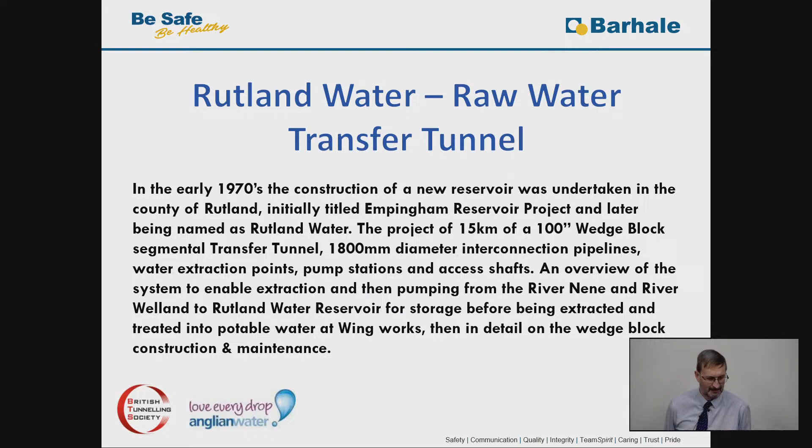The tunnels are constructed using wedge block tunnels, and when I was a site engineer in the late 80s, we were constructing the same thing for Lee Valley in North London. Since then I've also been involved in relining tunnels in London where the wedge block system has actually failed. That's why I'm so involved and enjoy understanding what's come out of Rutland - it's only about 10 miles from home as well.

So we're going to cover the development to the approval process, a bit about the design and ground investigation. There's two lots of shafts and tunnels - those connected to the back of the actual dam area, and the main tunnels that take water from the two downstream rivers up to the reservoir. Good bit about the segments because they're slightly unusual, and something about the shafts and tunnels.

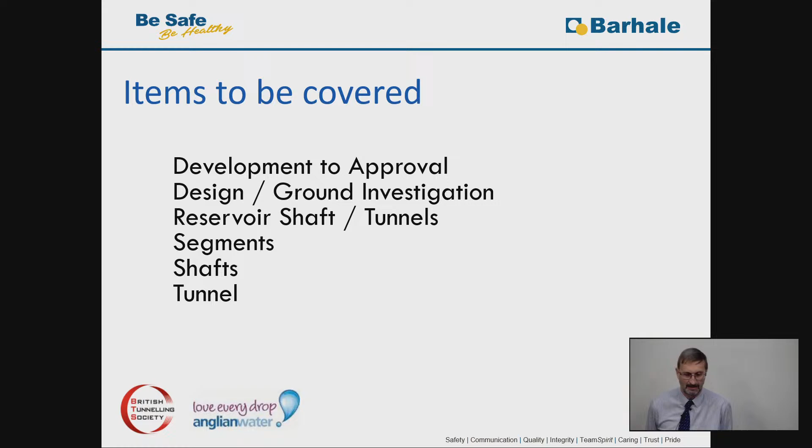The process all started after the reservoir at Pitsford was completed in 1956. The two engineers at the time, who worked for Mid-Northamptonshire Water Board and Thomas Hawksley's consultant civil engineers, moved over from that project and started looking at the location for the next reservoir. The reason was that they expected big expansion plans for several local towns in the 1960s and onwards, and there wasn't the water capacity in the area.

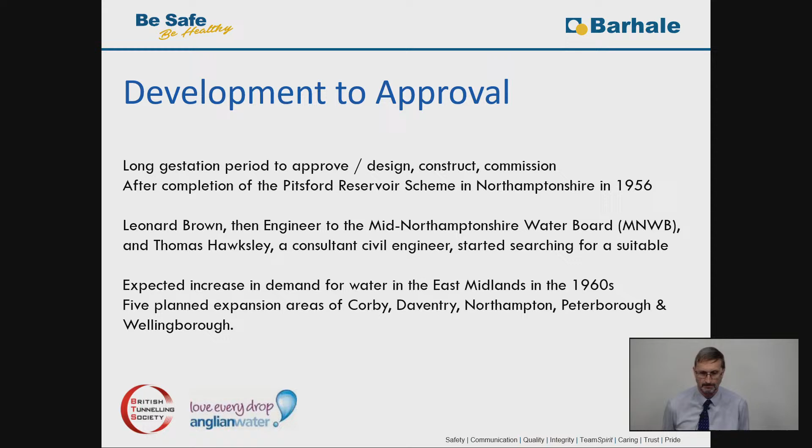Initially this was promoted by the Welland and Nene River Authority and the Mid-Northampton Water Board. They were looking at where to locate the new reservoir with a set criteria: they needed a valley with a suitable shape, the formation must be strong enough to withstand the dam construction, the geology must be right so you're not losing water through the base, and ideally you'd have local material for the dam, local rivers with large capacity to feed the reservoir, and local population needing the water without huge transportation and pumping costs.

Out of their investigations, they came up with two locations: the Gwash Valley upstream of Empingham, and the Chater Valley to the south-west of Manton. These were the two sites being looked at the time. At the moment, there's another long way since that - Anglian Water is now looking at their next two reservoirs and getting everything ready for what's called a DCO, a development consent order that has to be approved by the government. They're planning to be built in the next 10 to 15 years.

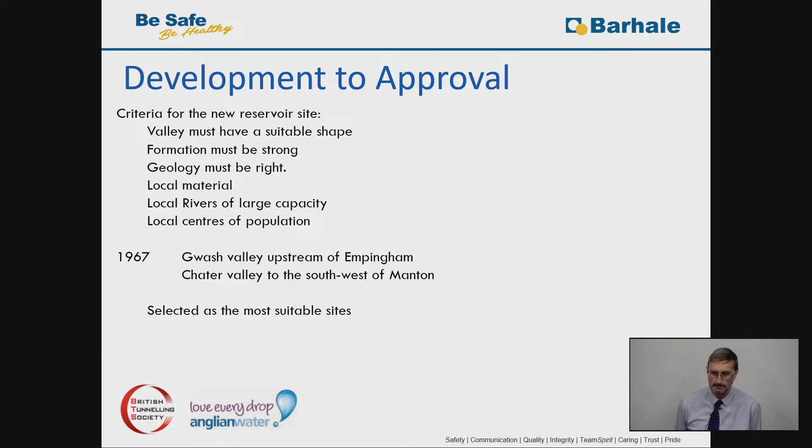So they did some primary geological investigation, and it was decided in 1968 to proceed with the promotion of these two reservoirs. Initially the idea was to promote both. After a while they decided just to promote Empingham Reservoir, and felt they could keep the Manton Reservoir option as an alternative for the future, whether that was in another 10, 20 or 30 years. But that has never materialised.

The two new locations are a long way away from that location. So the journey to constructing the reservoir started, and part way through this, the Mid-Northampton Water Board was replaced by Anglian Water Authority in 1973, and then later on in 1983 it was renamed and became Anglian Water.

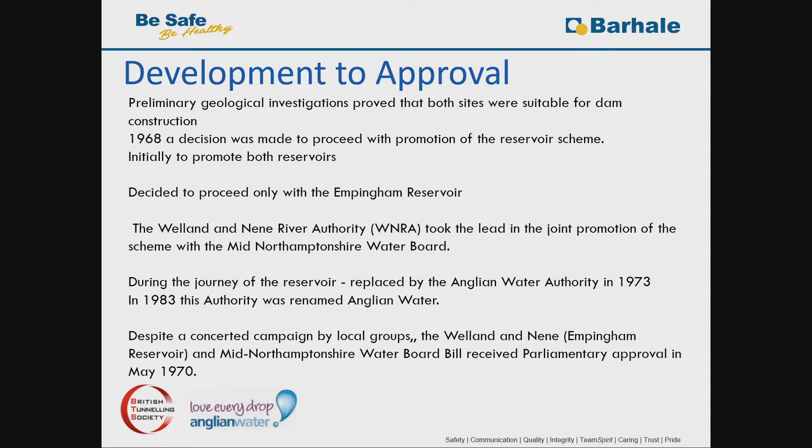The design was to flood around 6 or 7 square kilometres of the Gwash Valley, using the sides of the valley as well, not just the base, quite a way up the sides. Several villages had to be demolished to achieve this, and a lot of existing water wells had to be plugged as part of the ground preparation. The other great advantage was that there was a lot of clay in the area that could be used to build the dam.

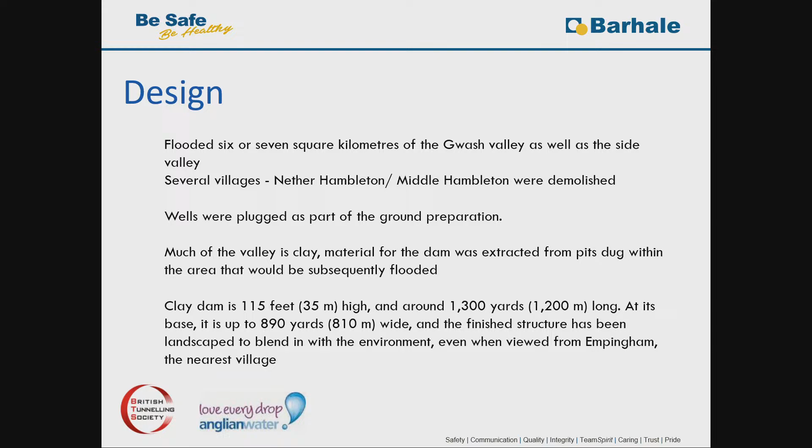The stats for the dam are there, and the finished structure - you can hardly see it if you go to Empingham and look up. It just looks like a big green embankment.

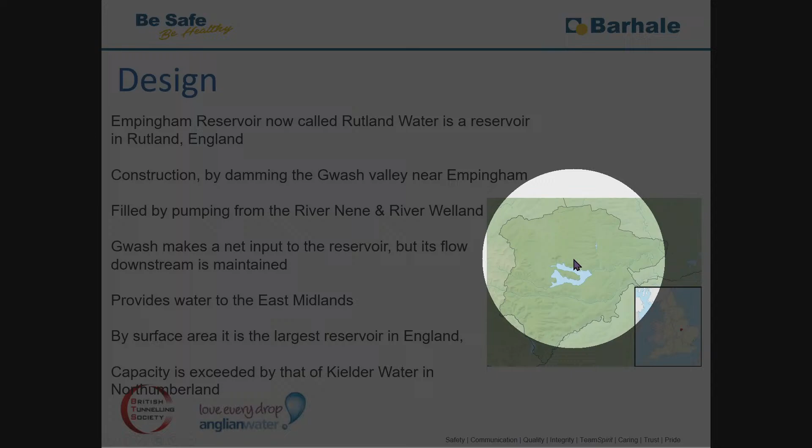To fill this reservoir, rather than using the River Gwash that comes down the valley - as you can see from the plan, it's got two arms, and the actual dam is right at the bottom here.

The Gwash River itself doesn't supply enough water to fill the reservoir. It does add some flow to the reservoir, but it is actually maintained downstream as well, so it still is an operational river as such.

The surface area of the reservoir is the largest in England, but its actual capacity is exceeded by Kielder Water in Northumberland.

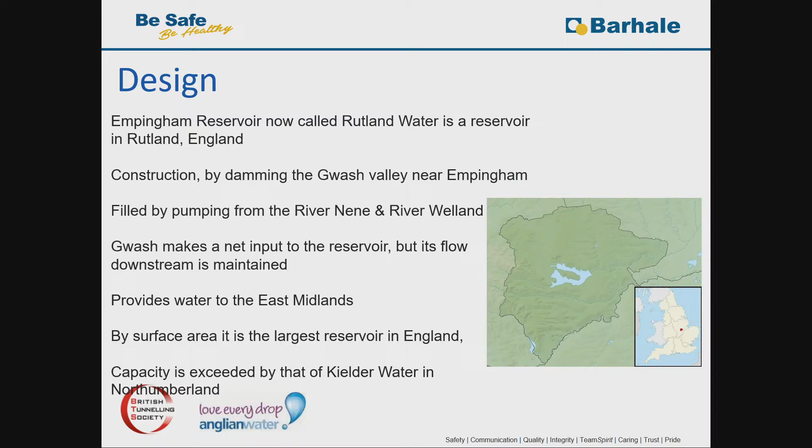The design and construction team: design responsibilities were spread across Welland and Nene River Authority, the main consulting engineers, and Mid-Northamptonshire Water Board. The main consulting engineers were involved in the diversion tunnels. The actual construction team were made up of Edmund Nuttall for the tunnels, and Gleeson Civil Engineering for the reservoir.

Something I'm not covering at all, but there was on some of the tunnel sections around the back of the reservoir, some tunnel relining, and there were some pipes installed.

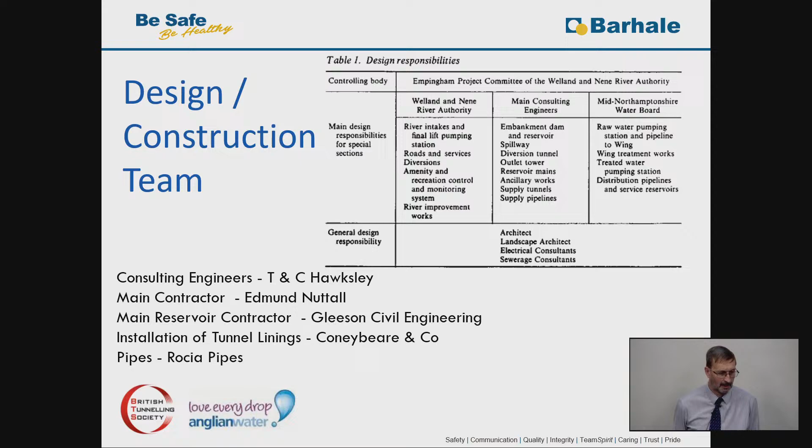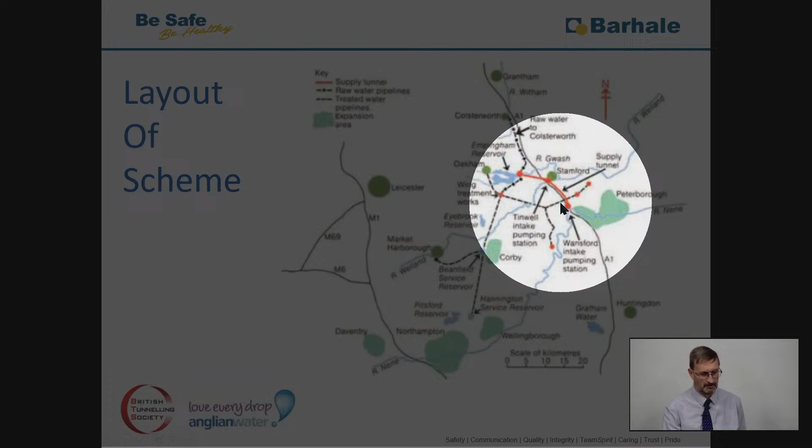So the actual reservoir in relation to where the water is coming from - you can see the reservoir here and the dam at the bottom eastern edge. But the flows are coming from the River Welland here and the River Nene here that goes into Peterborough. So to get the flows to fill the reservoir, they needed to pump all the way up to the reservoir.

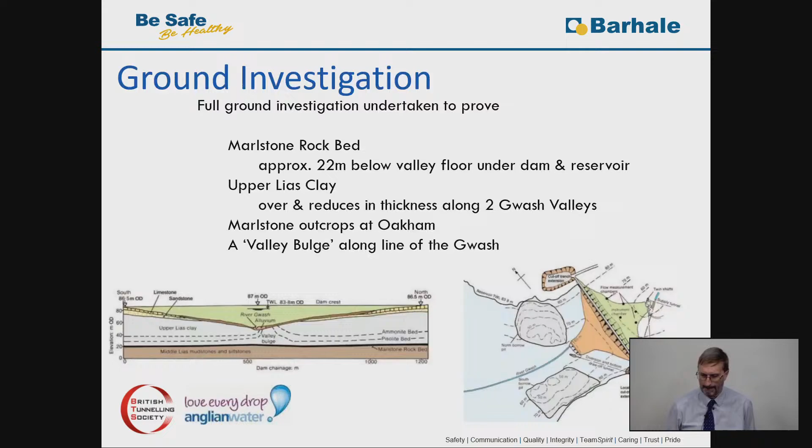A ground investigation was undertaken, and they knew that they'd got a Marlstone Rock Bed about 22 metres below the valley floor at the dam, overlaid by upper lias clay. But as that goes west up the two arms of what is now the actual reservoir, it became thinner and thinner, and eventually at the top end, which is where Oakham is located, a town in Rutland, the Marlstone actually outcrops.

Across the valley floor, that section also shows the green, which is basically the dam when it was completed. You can see a valley bulge that's occurred between the different stratas - it's heaved up, and that's a very interesting factor that comes into the shaft construction of shaft 6A and 6B a little bit later.

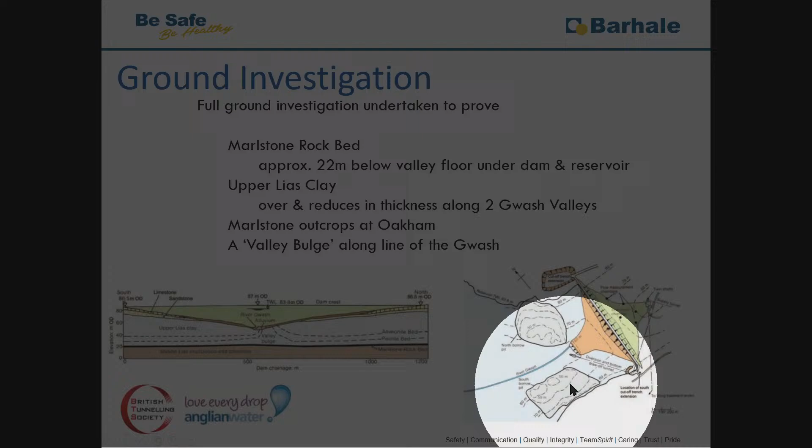Here you can see the proposal for the dam, but you can also see two grey areas, which is where the clay was removed to help construct the dam itself. So an absolute perfect location, a very narrow area to actually fill to produce the dam, but you'd also got the clay literally at the back of the dam itself.

The ground investigation did prove that there was a lot of disturbance, but it wasn't fully understood until the other shafts were put down, exactly where that disturbance was in relation to those shafts.

What it did give was, when they were actually constructing the supply aqueduct tunnel and everything, it made it very easy because it was very disturbed and easy to excavate.

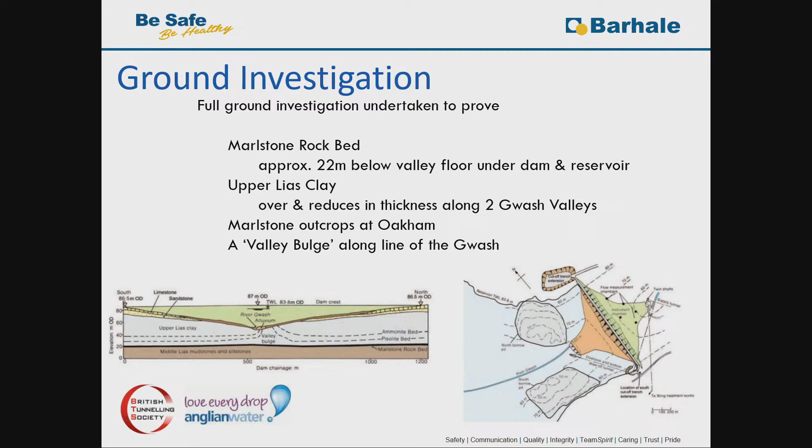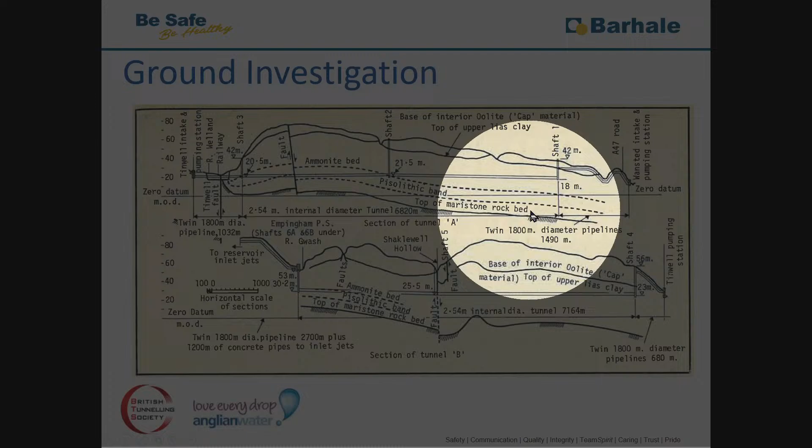The actual works around the reservoir - you've got your dam here, but there were also additional tunnels they were looking at. Normally you'd have an outlet tunnel coming through the middle of the dam underneath it. They decided instead to bring it out sideways and put an outlet shaft here, with a feed round the side of the dam to allow the flows to go back into the river if needed.

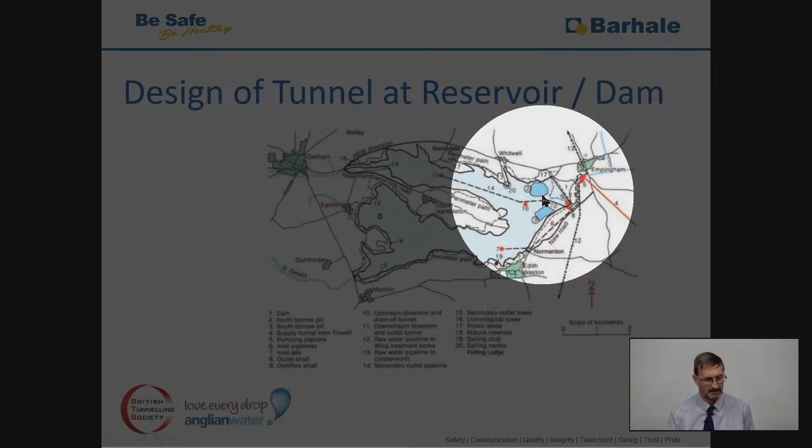This was very beneficial for the actual construction, because rather than having to put that through and delay the start of the dam construction, this could go on to one side while dam work initially started.

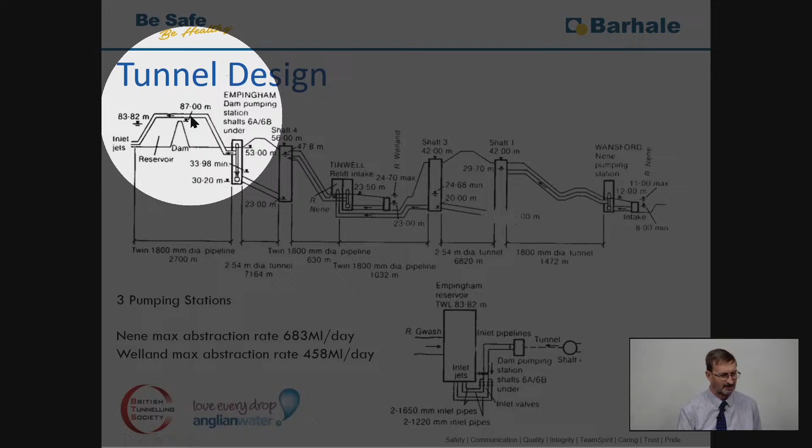A bit simpler version of what I've just explained: the water is extracted here, goes up the 1800s to here, drops down the shaft, along, then picked up at Tinwell, so it relifts up the hillside and on to Empingham, then up. It doesn't actually go over the top of the dam, but goes at that level around the side, then up the reservoir and through some inlet jets. You can see that described here.

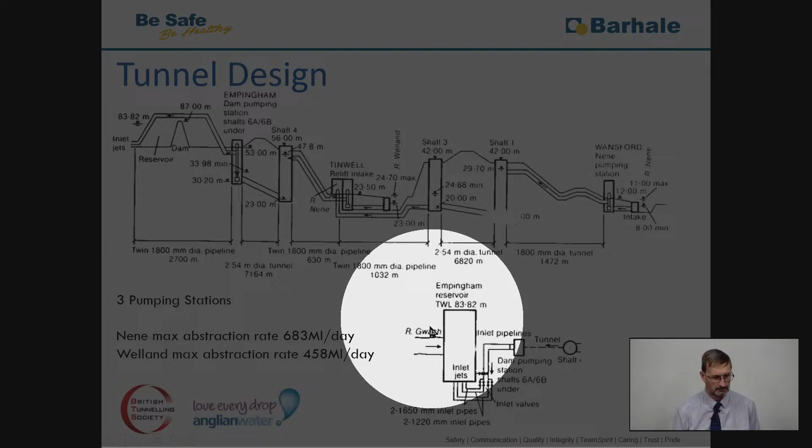You were talking about 7.9 cubics being extracted from the River Nene, and from the Tinwell about 5.3 cubics. Those figures have slightly altered over the years with different extraction licenses being applied for and EA requirements, but that's principally the sort of flows it was originally designed for.

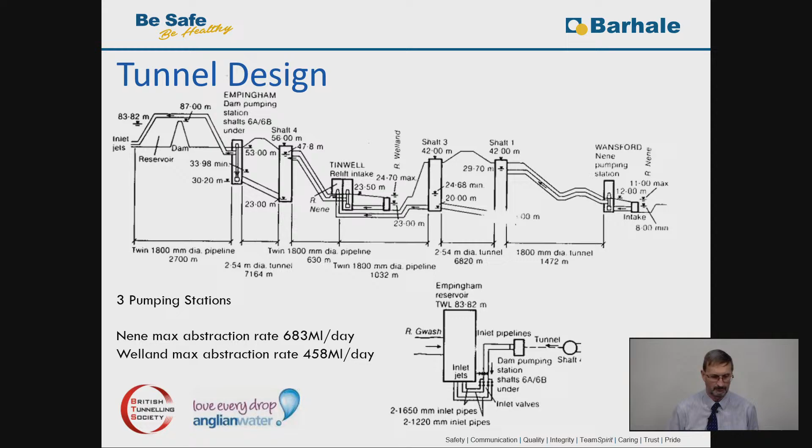So just covering the tunnels that were constructed at the back of the reservoir - you've got an outflow structure here, an outlet shaft here, a 3.66 tunnel this way, and a 4.42 tunnel going down this way.

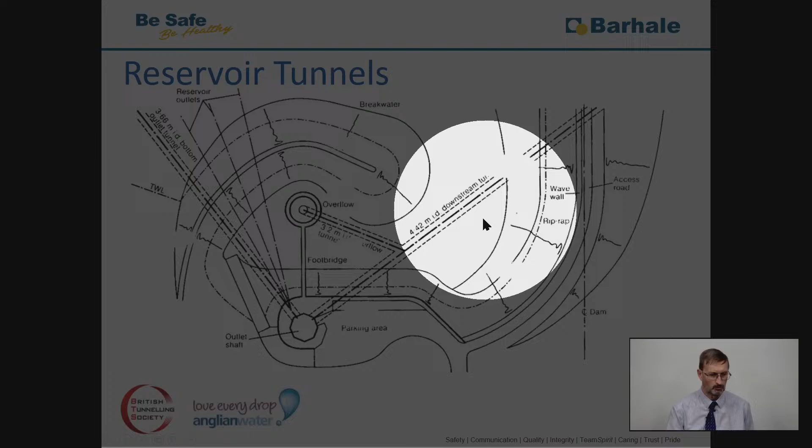These were all constructed while some initial work was going on with the reservoir dam itself. This also allowed for other things to occur because of expected settlement in the valley bottom - it was handy to have the tunnels and everything out of the way. They needed to put in a lot of deep sand drains that needed to be installed, and it kept the amount of tunnelling to a minimum by going round the side rather than down the centre of the reservoir itself.

And that's a photo of the outlet shaft going down. Back in these days, most shafts were constructed with concrete segments, classed as bolted segments, because they had pans in them and the bolts went through the webs. Today most shafts are constructed with either one-pass or smoothbore segments, but this was the way shafts were constructed in those days. The shaft segments were a lot cheaper to make this way.

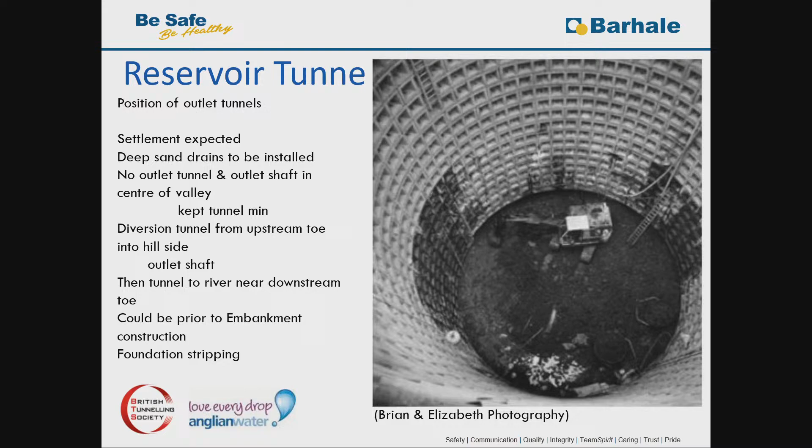The outlet shaft was 10.66 metres, 35 foot. The two tunnels were 3.6 and 4.42. They were both bolted tunnels as well, segments looking exactly like the ones for the shaft. But the upstream tunnel needed to be smooth.

So in those days you used to get a piece of concrete supplied by the supplier, called buckfill, because they were developed initially by a company called Buckham's that used to make the segments. You literally put this lump of concrete into each of the pockets with some mortar, filled it all in, and pointed it up, which made the tunnel smooth in the end. It looked like a normal one-pass tunnel that you see today.

The downstream tunnel was not done like that. They needed to put a landing in it to support one of the pipes, so they could have another pipe underneath it and various other utilities they wanted there. So when they put in the landing, the shutter also cast an in situ lining, so they didn't actually have to fill those segments with the buckfill.

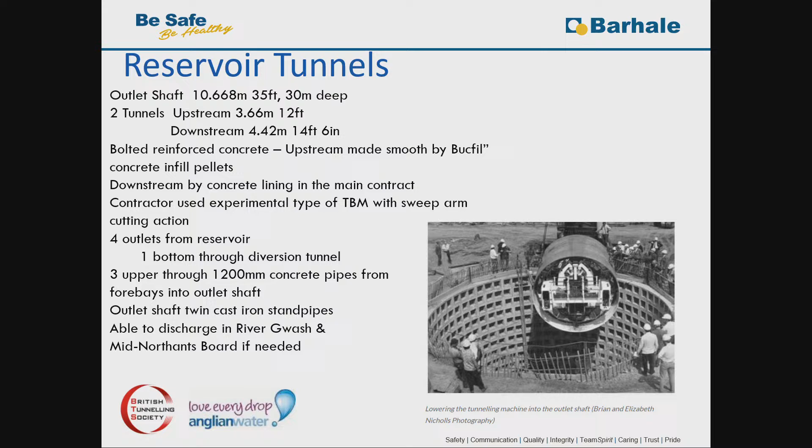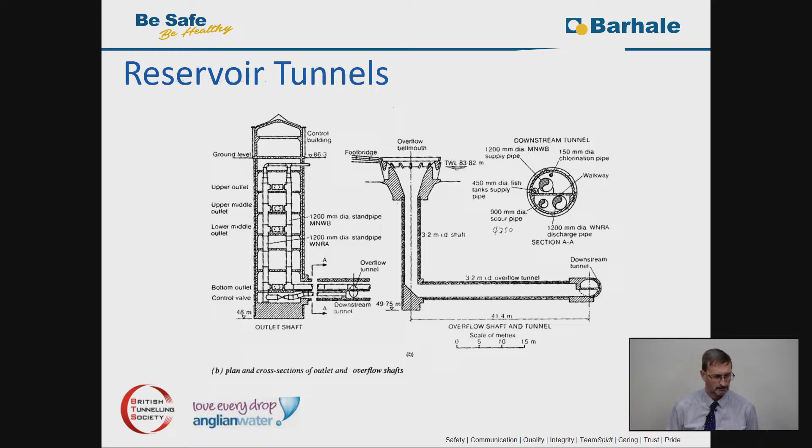So the 100-inch wedge block, it's slightly unusual. It was first patented in the 1940s. There's hundreds of kilometres of it installed around the country, the bulk of it in London, in stiff clay and chalk.

The segments form the ring with two wedge top segments. There's 9 segments plus the 2 top, and then you've got a key. You push the key in, it expands the rings apart against the surrounding clay or chalk.

This works in compression. There are no bolts holding these segments together, and they are either non-reinforced or very lightly reinforced. Sometimes they've got a bit of reinforcement in for handling and transport and that side of things.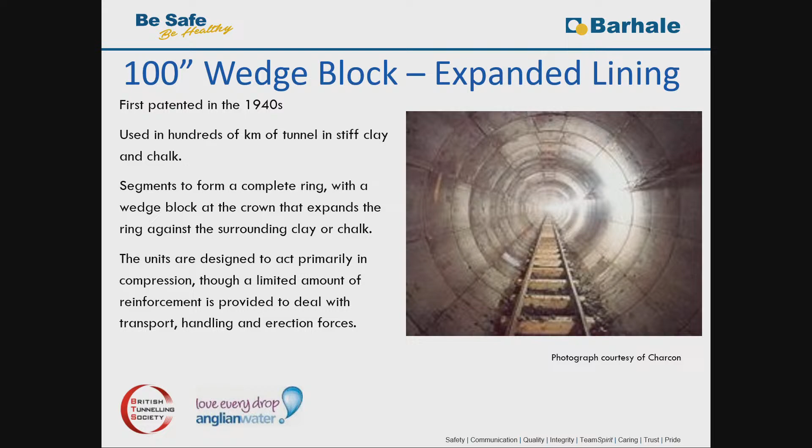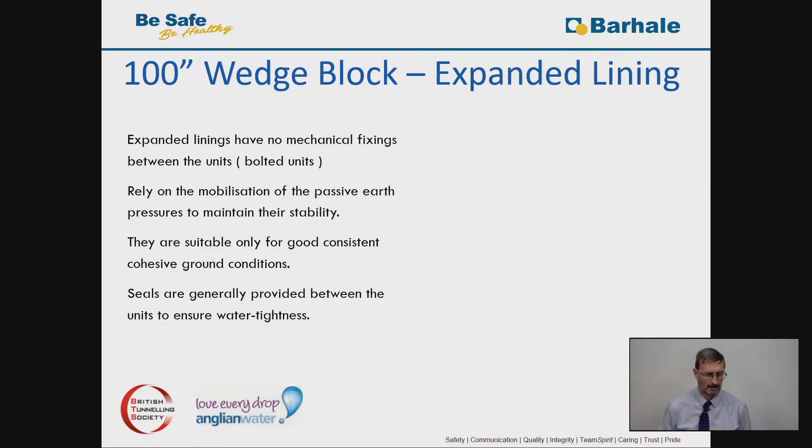So when you push in the top key or wedge, the top segments are tapered, and so is the key. You're trying to get it to push against the clay to a certain degree, or set. The tunnel machine is pushing that with a ram, pushing that key home, and it has a set, and that then gives you your required compression against the existing ground.

Depending on how the machine is cutting the clay or the chalk, if you're not quite obtaining the set you need when you push it home, the keys can come in different sizes. If you're struggling to push it home fully for any reason, you can go to what we used to call a -3 or a -6, slightly smaller. If you weren't getting the right compression and force on the set, you could go to a +3 or a +6. So you had that facility - literally a pile of them next to you in the tunnel machine, so that as things changed you could just change that key very slightly.

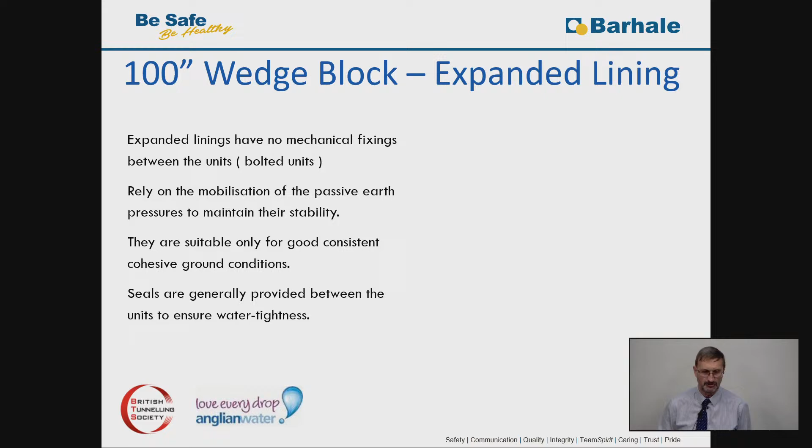When you do push it in, you'll see on the next sketch that the actual key is not the full length of the segments. The segments are 686, and the key is slightly smaller in length, so you had a little gap. As the key was pushed into place, you can see here the tunnel machine is going this way, and the wedge is being pushed in this way, but that wedge is not the same width as the actual wedge block, so you had a little gap left. You can see the little gap that's there.

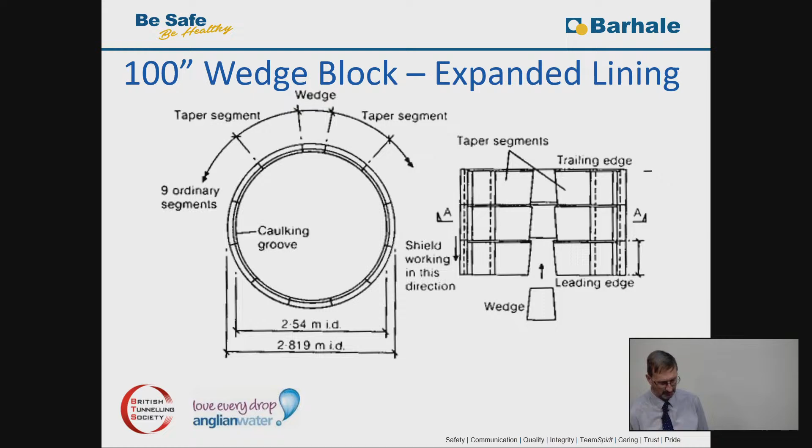Well, that was filled with what was called a rat bag, which was literally a Hessian bag, a sandbag, filled with cement, put up there as the wedge was pushed by the tunnel machine, and then after it was installed it was pointed over. That has caused some problems in other places over the years, in that the sandbag and the pointing that was covering it and keeping it in place has come out.

The pointing's come out, the water in the tunnel has then got hold of the sandbag, eventually eroded it away, and there have been instances in various places where the water gets up into the ground above, erodes the material above, and eventually you lose the overburden pressure that's holding the segments in place.

Unfortunately the segments then come down. There have been a couple of instances, and I've been involved in places in London where we've actually had to go and put in a new concrete tunnel lining, an in situ lining, that's a permanent lining. It's not utilising any of the existing wedge block - it's a new permanent lining.

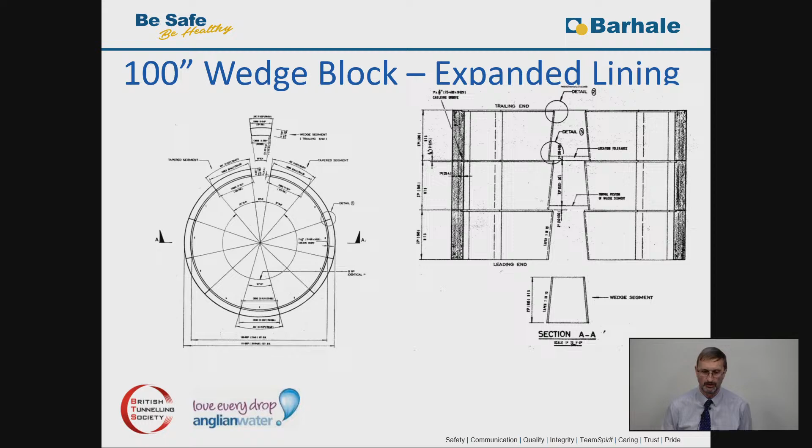Something not applicable to Rutland, but I also worked on Lee Valley, where we went under various reservoirs and also some water channels in North London. The concern was that at any time in the future, if somebody had to empty the reservoir, you would lose the overburden pressure, because that was designed into the calculation based on the volume of water in those particular reservoirs.

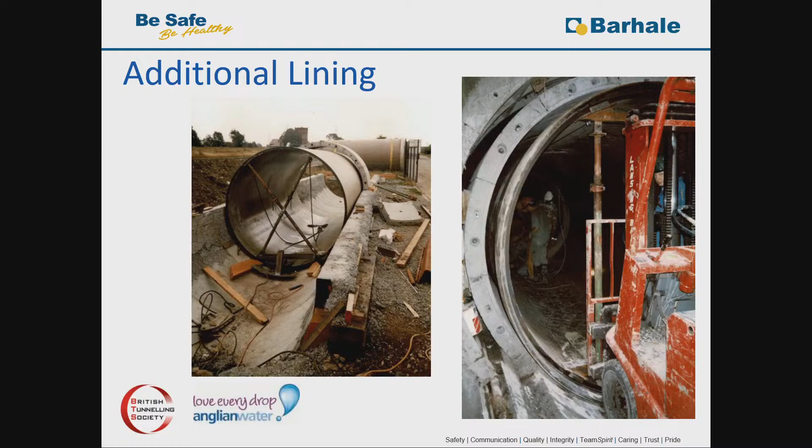The way around this was, in certain sections, to put GRP pipe in. Sometimes we put 1 or 2 in under a short stretch where there was a water course going across, other times we put 10 or 20. You can see how tightly they fit on the right hand side there. We spent a lot of time designing a frame and altering a forklift to drive these down the tunnel, in some cases 1.5 to 2 kilometres, to find the location they were put in. Then you'd put in 10 or 20, do a fancy taper to match back onto the existing segments, leave it for half a kilometre, and then put a few more in.

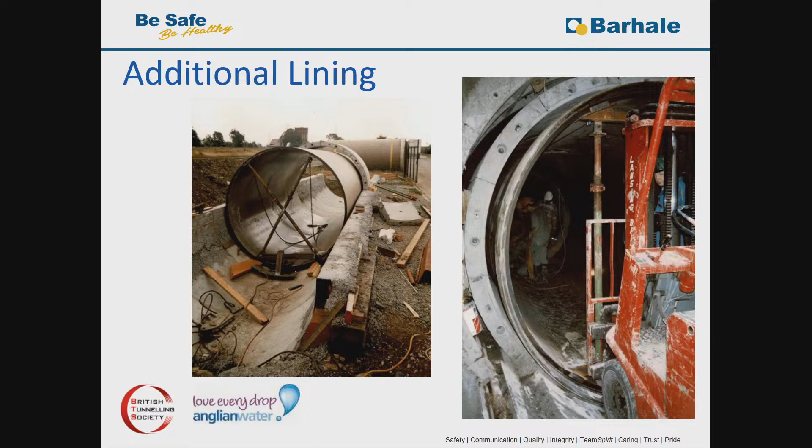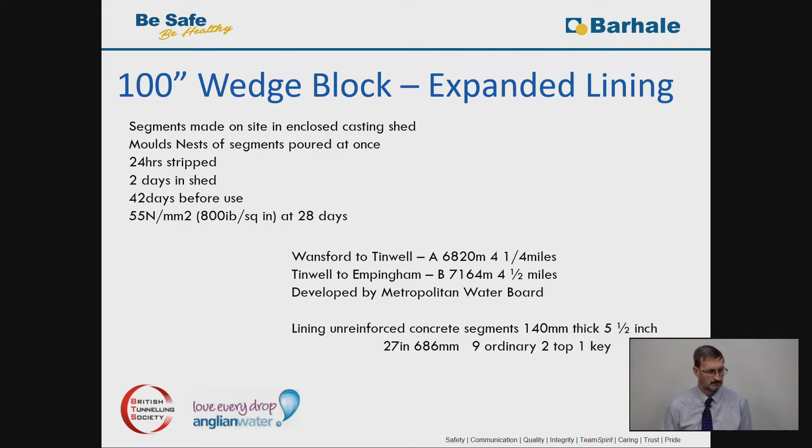For Rutland, the segments were all made on site in a casting yard near the Welland, between shafts 3 and 4. As a result, shafts 3 and 4 were used for the main tunnel drives, so the segments didn't have to be moved very far to where they were needed. They were cast in nests of segments, stripped after 24 hours, and kept in a shed made on site for 42 days before being used, by which time they needed to achieve 55 Newton at 28 days.

The Wansford to Tinwell section, that's Tunnel A, was about 6,820 metres, and then Tinwell to Empingham was another 7,100 metres.

Wedge Block was originally developed by the Metropolitan Water Board. The segments are only 140 thick, 27 inches long, and as I said before, you've got 9 ordinary, 2 tops and a key.

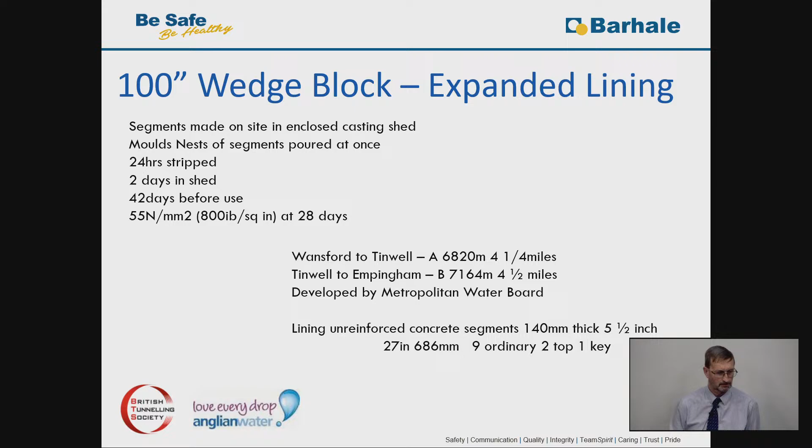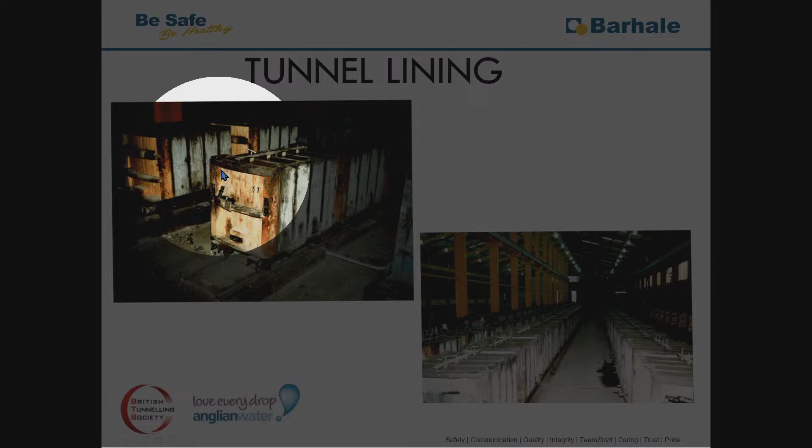These are some photos of the segments being made, this is in the 1980s. This was at what used to be called Charcon, who used to make segments. In those days there were 2 big companies, Buckham's and Charcon. This one was at Mansfield, I went up there for something to do with Lee Valley, so it's very similar. You can see the batch of segments being cast, exactly the same scenario as at Rutland, and you can see them all stacked up here. This is a permanent setup.

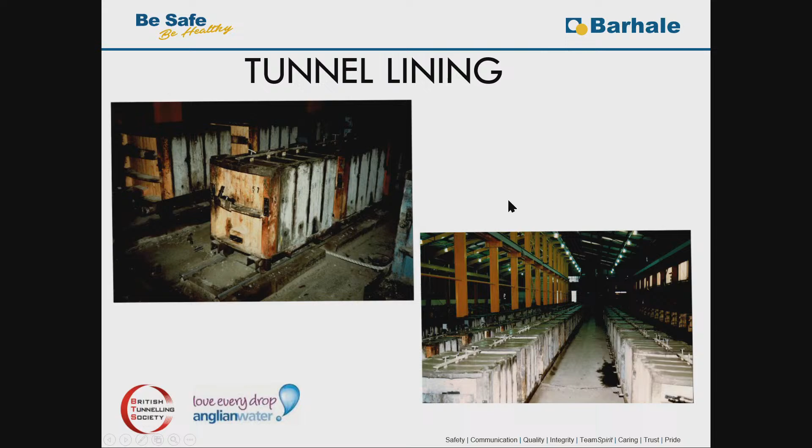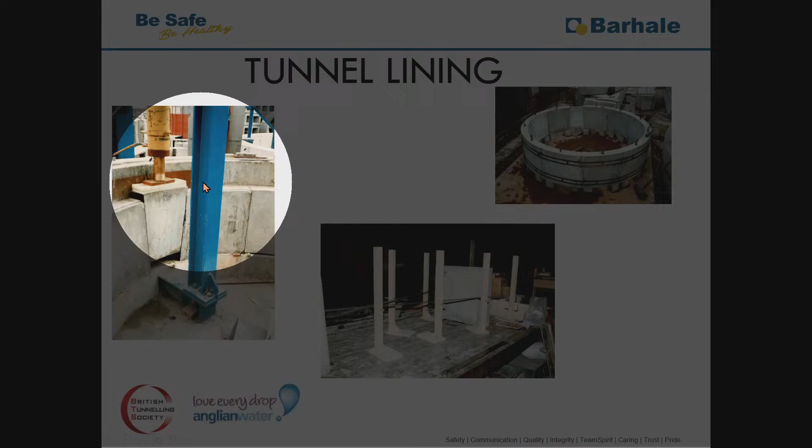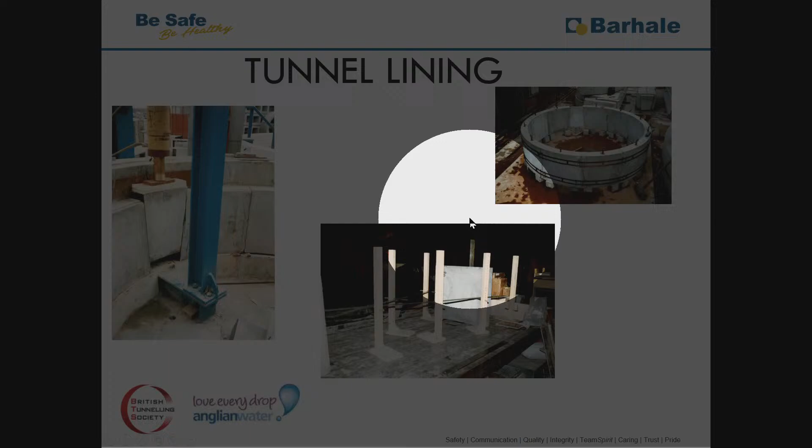You can see a configured wedge block ring there. This was some tests that were going on, where we were testing the forces required to put it in with different sizes, so between plus 6 and minus 6, we were looking at how that worked. We were doing some tolerance tests on how they were built together, and on the angles of the faces using a rig that was set up. Remember, this is the back end of the 80s, it's probably all done digitally these days.

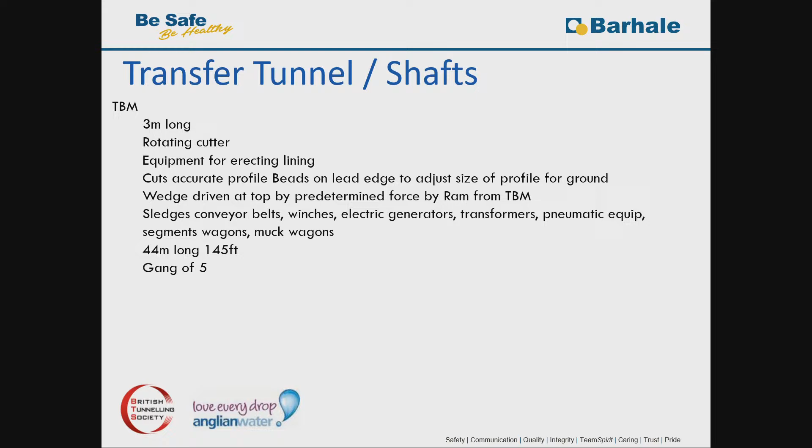So onto the TBM used at Rutland. It was 3 metres long, had a rotating cutter, and was equipped with erecting equipment to lift and install the lining, although some segments still had to be lifted and pushed into place by the workforce. Not as complicated as the machines you see at HS2, Crossrail and so on.

The machine cuts, and it's got a bead which you can adjust because you don't want too much overcut, as you're trying to push your segments back out against the clay to get the overburden to start working on the segments. The wedge, or key, is driven at the top by a ram off the top of the TBM, and behind that you've got various sledges with conveyors, winches, generators and other items. The whole TBM itself was about 44 metres long, with a gang of 5 operating it.

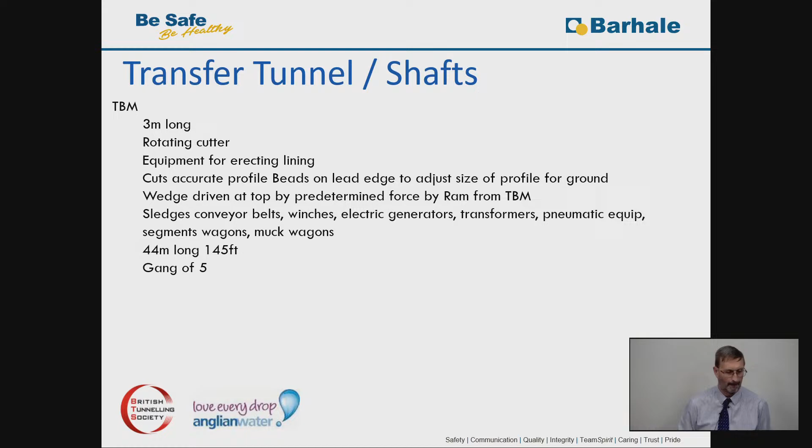Some bits of work were done well in advance of the tunnel being started. At shaft 6A and 6B, up at Empingham right by the reservoir, they were constructed, and between them a cross passage of 15 foot was done. Off that cross passage, the leg of a T was put in, which went about 200 metres to receive the TBM.

On Tunnel A, there was supposed to be a tunnel at shaft 2, the idea being to prove the ground and also to use it for muck away. Because of the location and the ground there, the idea was that you would possibly have to build some segments there and allow the TBM to come into it. So it was a way of reducing risk by having the machine come straight in and through a section of faulted ground.

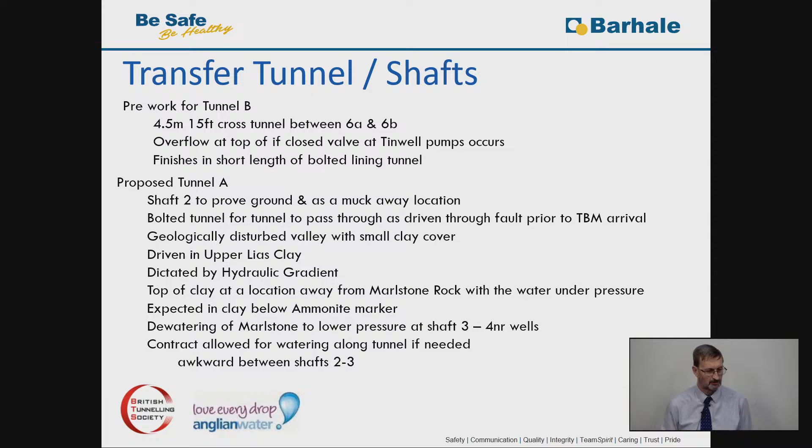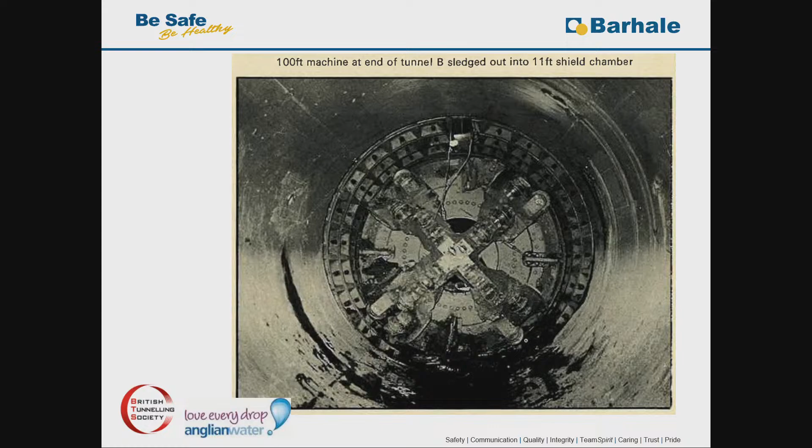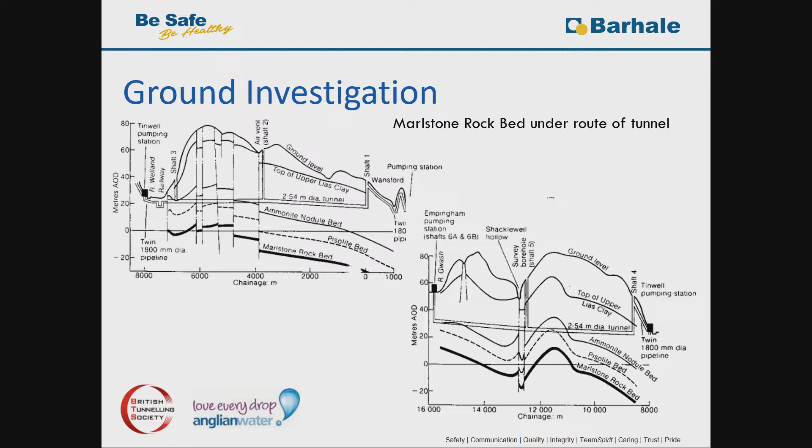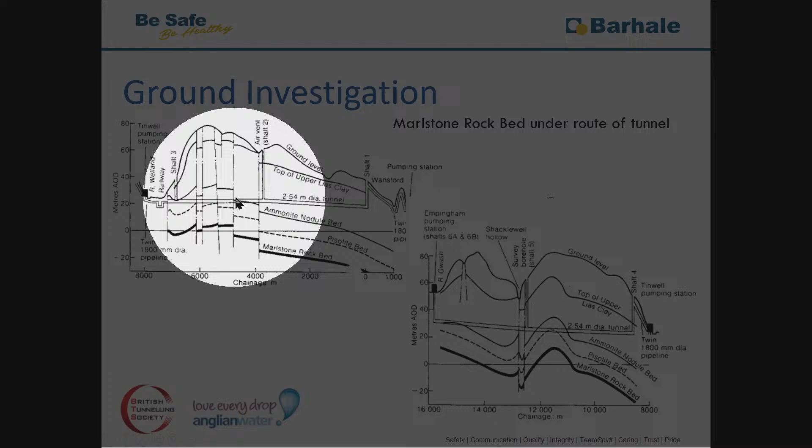Just putting that back in to refresh you on where all the various layers are and how the tunnel is shown to go through various areas here and here, because that's very relevant in a few minutes to do with how the tunnel progressed when it started to be constructed.

The shafts were deep. Shaft 1 was 20 metres, shaft 3 was 19, shaft 4 was 31 metres. They were all 10.66 metres in diameter. They were so big because of the oscillation surge if and when the pumps had to shut down.

So there's no actual pumping here. You extract at each location, and that allows the water to flow through the tunnel - you extract at the upstream end of each of the tunnels. The shafts then had landings and things installed.

The contractor, Nuttall's, decided that they didn't need shaft 2 and shaft 5 - a big cost saving. But they did put 400mm boreholes down, and these are permanent air venting points on the tunnel even today, because they were positioned at the high point of the tunnel. They also gave more information regarding ground conditions, allowing in some places the tunnel to be regraded to have a 6-metre cover to the Marlstone.

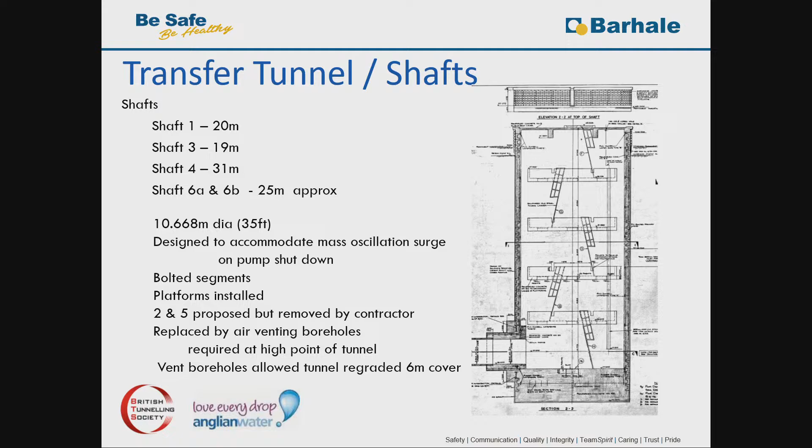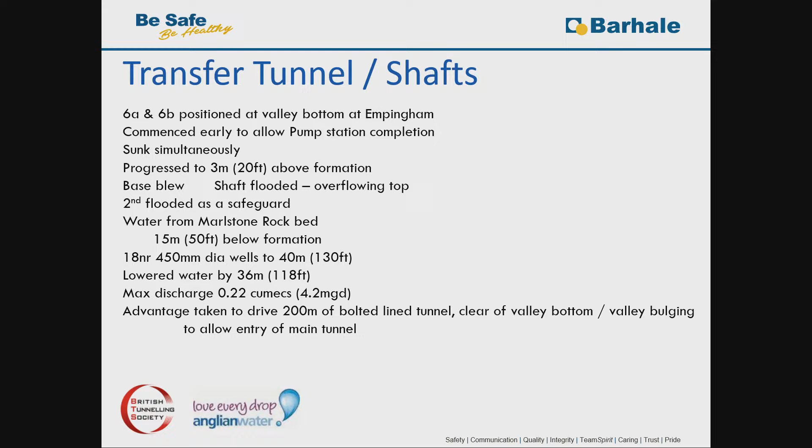So 6A and 6B started very early. The idea being that they needed to start on the pumping station, so these were sunk near enough simultaneously, one a couple of metres ahead of the other. The first one progressed to about 20 foot from its formation excavation level, and the base blew. The shaft flooded and was overflowing the top.

The second one was flooded on purpose as a safeguard, and the water was coming from the Marlstone rock bed, which was, in theory, 15 metres below the formation of the shaft. To progress the shafts, they put in 18 dewatering wells down to about 40 metres. This lowered the water table by 36 metres. At one point they were pumping 0.22 cubic metres, which did ease off.

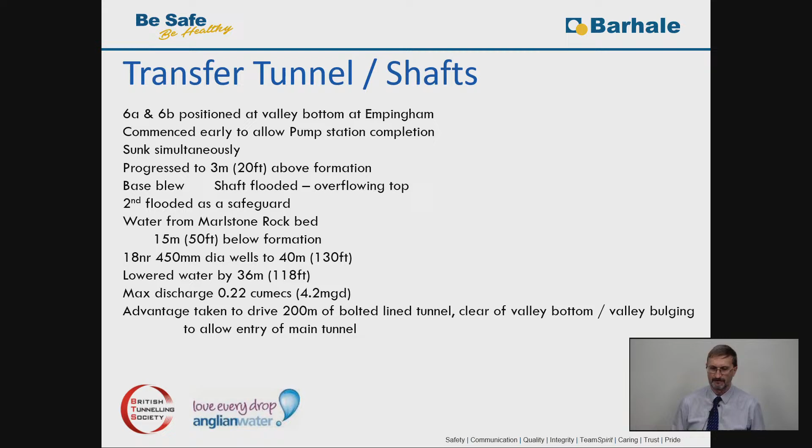With this dewatering installed, they also took advantage and put in the cross-connection tunnel between the two shafts, and also the stub tunnel that was required. That excavation also proved that what they'd put the shafts down through was the valley bottom, with valley bulging occurring - putting it right in the valley bottom meant the strata was near enough vertical. Unfortunately, the water from below had an easy path to come straight up into the bottom of the shaft.

So from this, they learnt a lot about what needed to be done, which is why the stub tunnel was driven with the dewatering in place, so that when the TBM came - because it's a machine that had to be in relatively dry conditions, not a full-face tunnel machine like you see today that can go through high water table conditions - this was a way of working and getting the receiving point outside of the bulge that was occurring.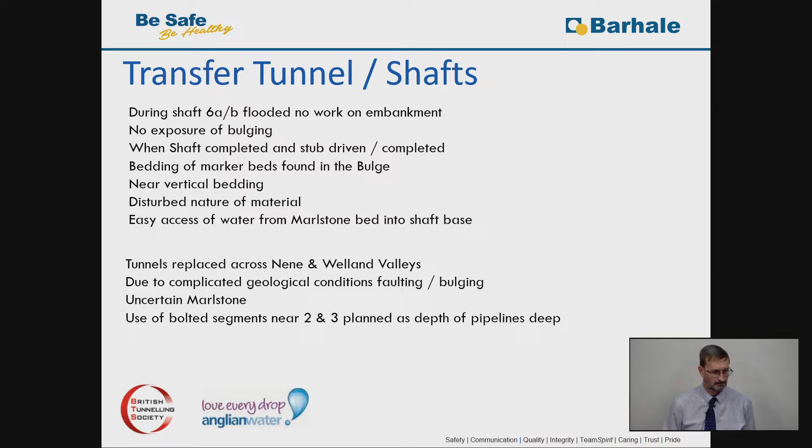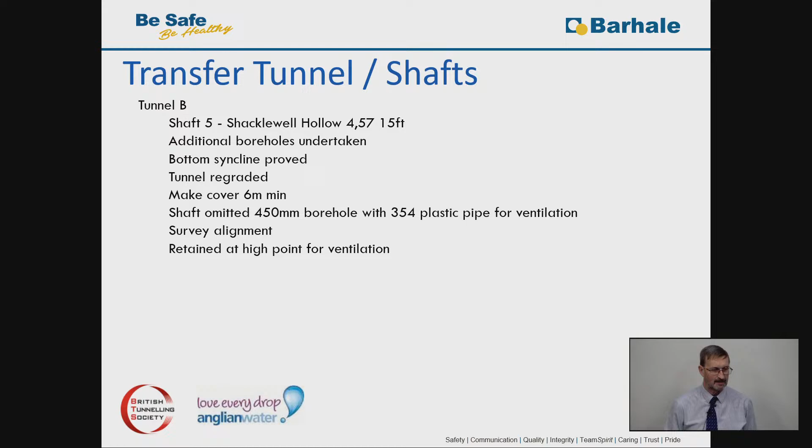Tunnel B, as I say, shaft 5 was removed and was just, again, another borehole was put in place. And again, from information they got from putting that borehole for ventilation and for survey alignment, they again played slightly with the gradient of the tunnel.

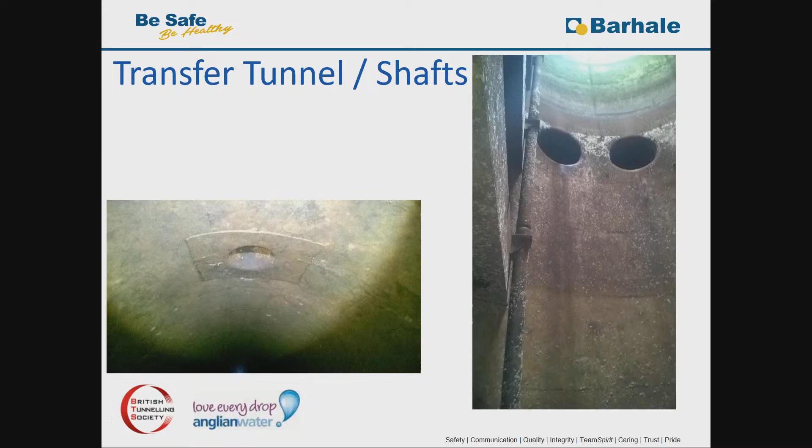I mentioned that we did an inspection back in 2018, I think it was. That's one of the, I can't remember whether that's shaft 2 or shaft 5, but that's the shaft that was then replaced by a borehole and has permanent ventilation.

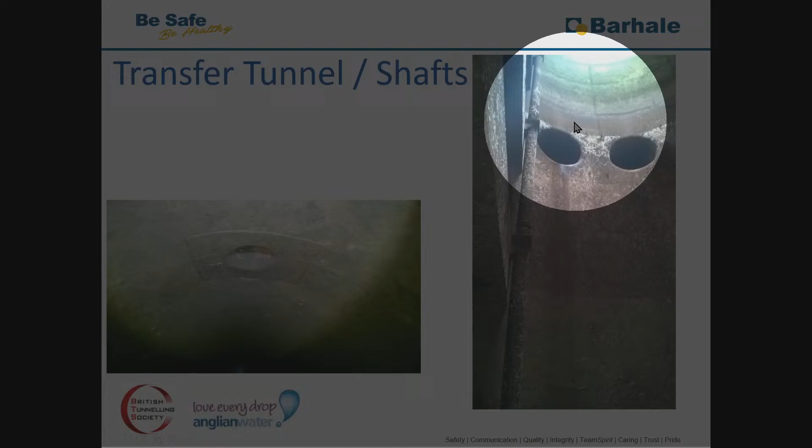This is inside one of the shafts. This is shaft 1, and these are where the two 1800s come in at a high level, and the flow goes into the shaft. It doesn't drop in because the water level, as you can see, is kept right up to the top level there.

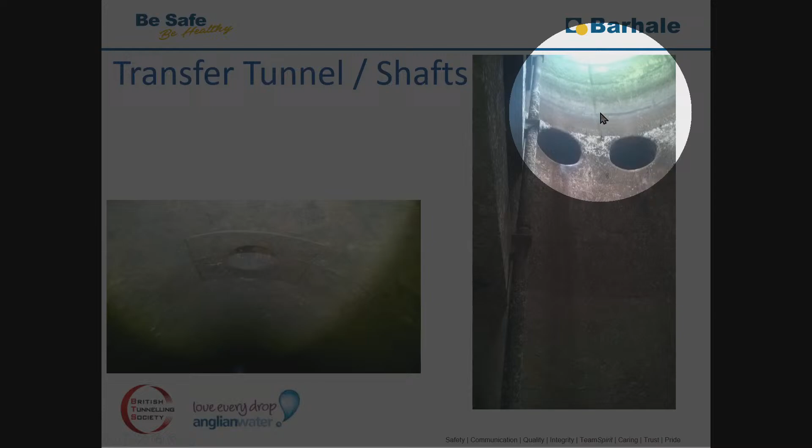The TBM was put down in January '73, and initially it was doing 37 rings in a 10-hour shift for the first three weeks.

They then started coming across some marker beds, and they then found that these were actually harder than expected, and the cutters were only scratching and causing lots of dust. They were down to about 1 ring a shift.

In mid-June, the band faulted out, and they were back up to around about 30 rings in a shift. They then started having problems in the top section. They were getting a lot of overbreak and blocks of clay coming out, and this was causing problems at the back. They were having problems trying to push the rings and get the right sets on the ring.

They were unable to fill the voids. They did try extending what's called the tail skin on the back of the TBM to be able to build the ring, but then they were finding that they weren't able to get the right set still.

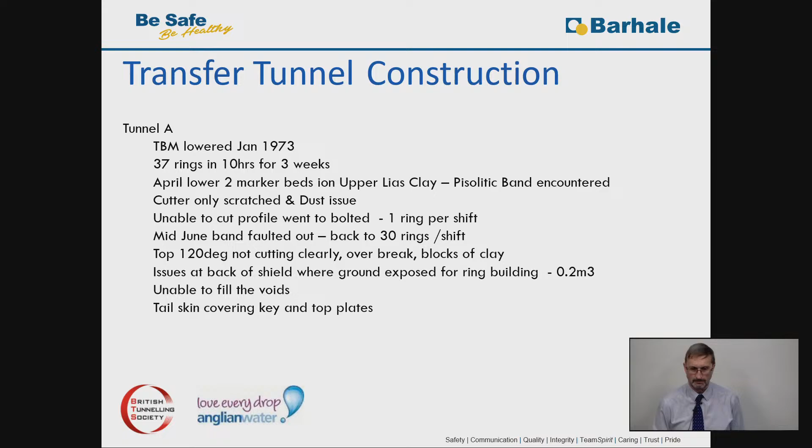There was a lot of hand trimming going on, and a lot of grouting, because what they also did, they went to bolted segments. You can get a version of Wedge Block that you can actually bolt, which you're using if the TBM goes into bad ground, and like here, when you've got blocks and things, you can actually use a bolted segment.

It's a lot slower, and you've got to grout it. It doesn't work on the overburden pressure. So normally it's only used when you're breaking out of a shaft or the TBM's coming into a shaft.

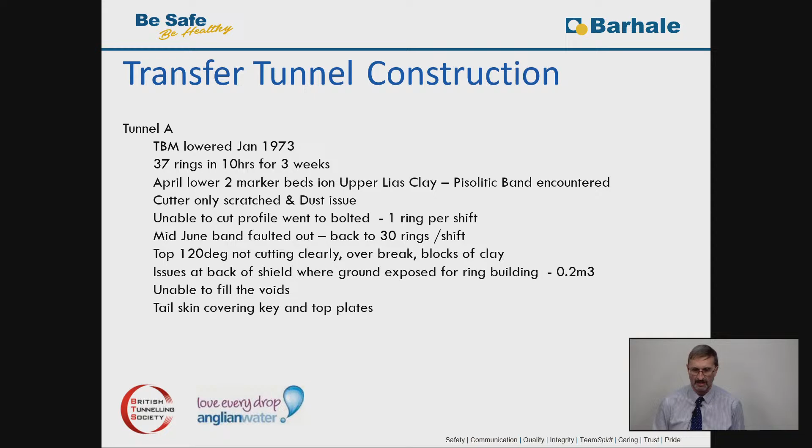They did a full-scale trial on it, playing with various ways of doing it. And the outcome was that they would use puddle clay and what they classed in those days as pickled timber to fill the voids, and then they would build the segment and force it into place.

They had put on rock discs, and because before they'd got clay picks on, this increased the production back to 35 to 40, and they had a maximum of 51. I think at Lee Valley we ended up getting 65 at one point.

The cemented clay bands, some of it was tested here at Newcastle, and that was coming in at 84.5 Newton. They then started having a problem with the moisture content in the face, and it was causing the clay to come onto the head and onto the shield, and that slowed production.

So the rock discs were removed after 2 kilometres, and the clay picks were put back on, and production went back up.

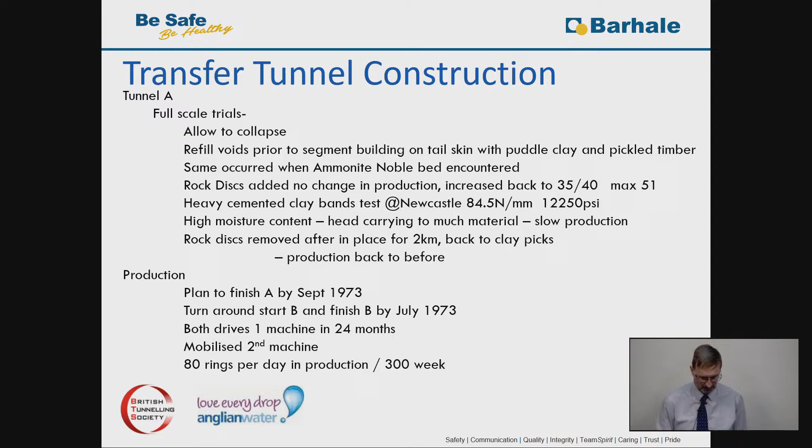A couple of photos from Lee Valley. So again, not Rutland, but it just gives you an idea of the sort of backup equipment that's on the machines.

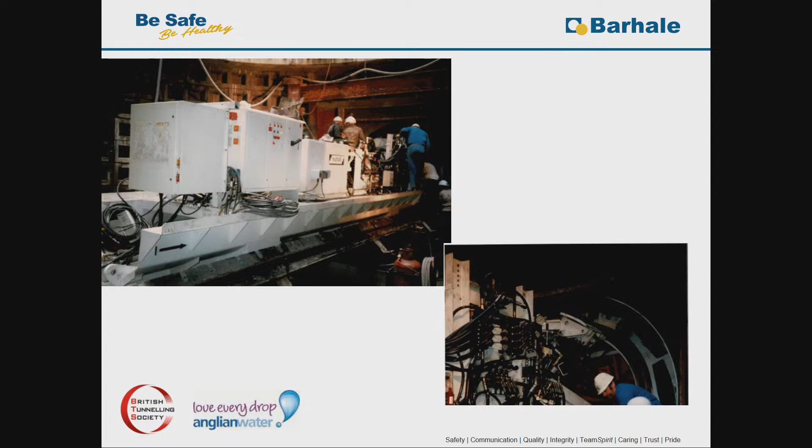Tunnel B, again, has similar problems after about 2.5 kilometres, but they put the discs on straight away, and they managed to keep going at 20 to 25 per shift. Still getting overbreak, but by this time they knew how to cope with it, and the miners became very proficient with it.

When they got to the end of Tunnel B, Tunnel A was going from 3 to 1, and then it was taken out at 1. Because you'd got the cross connection between 6A and 6B, it was going to be very hard to take the machine out there. So what they actually did, and so it didn't affect the construction of the pumping station on top of those 2 shafts, it was dismantled and removed back from shaft 4.

The two tunnels were fairly consistent in the end, 54 weeks and 53 weeks each, with a slightly different number of rings. Just over 20,000 rings were installed on the project.

But the client had a few concerns about all the ground that was lost, and whether all the right procedures had been put in to ensure that you still had the right overburden pressure and everything onto the rings. So they did some grouting tests. Basically, they couldn't get any grout in behind the rings, so they went at various places along the tunnel with the client, installing grouting and see if they could inject any.

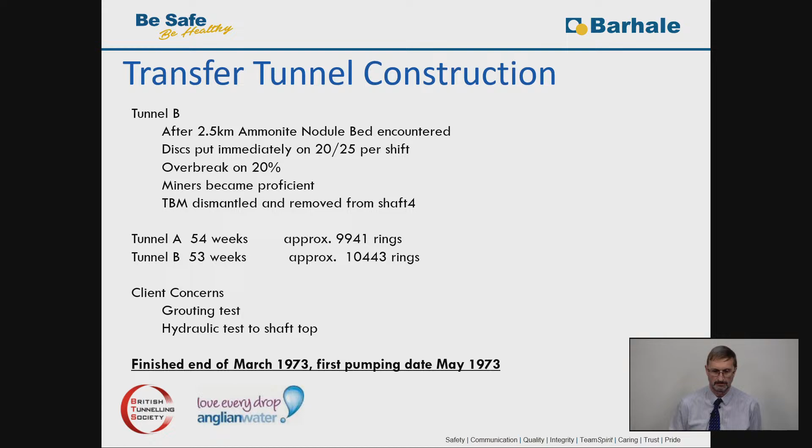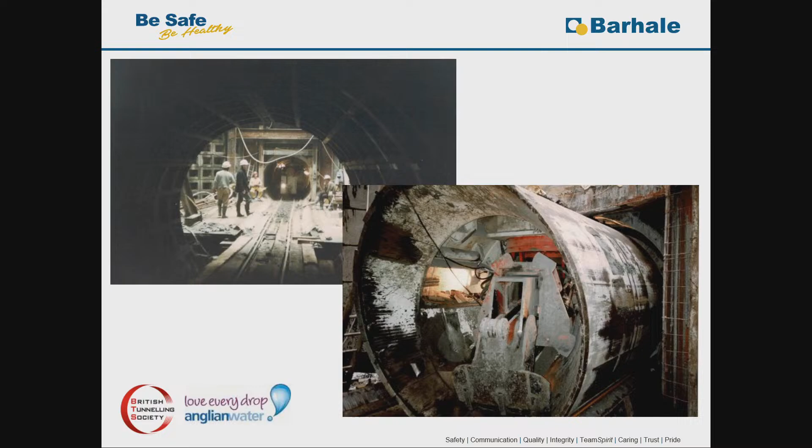Again, just a couple of photos of the TBM at Lee Valley. Slightly different because this is a back actor, but it gives you an idea of the size and complexity in the front of a TBM. There we were lucky, we put in a back shunt to give us more space when the locos came out with all the material on. You could get more locos, put them into the back shunt and then steadily remove them. But it just gives you an idea of the work involved in driving a tunnel.

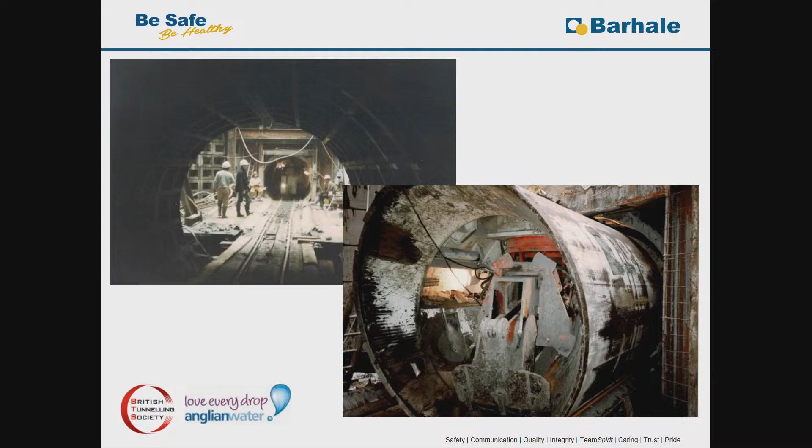A couple of other slightly more interesting things about Rutland. Probably seen it was on the TV and various other places - they found the Rutland Sea Dragon in 2022. They'd got the reservoir down quite a bit, and were doing a lot of revetment work around the edge, and somebody happened to spot this. It was excavated, and I don't know where it's actually located now, but it was quite a find there.

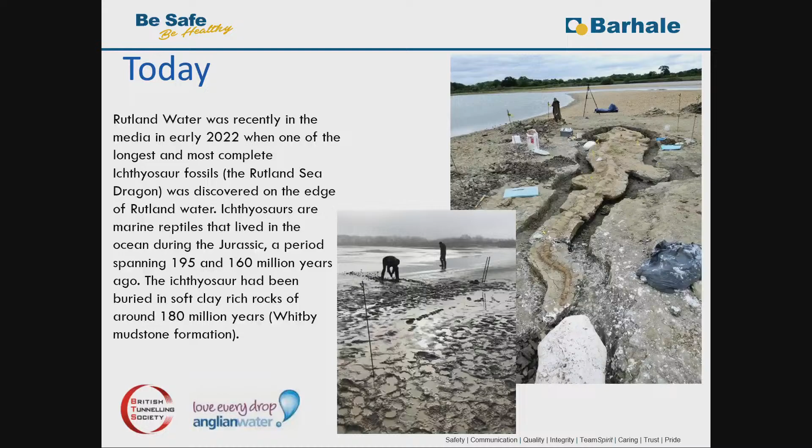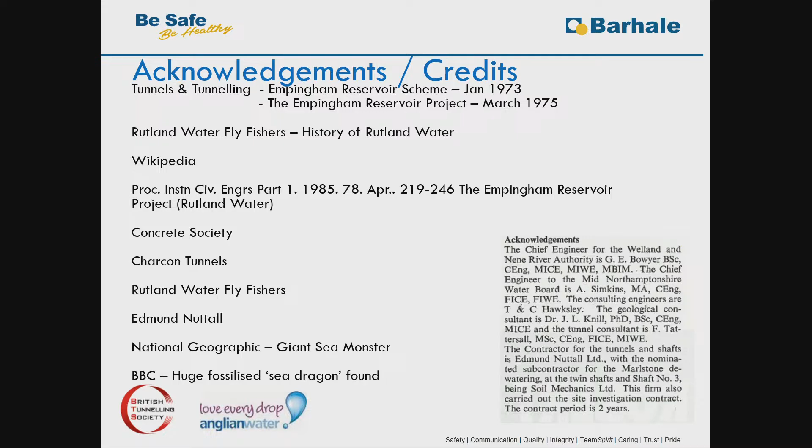Thanks. Can I ask you another question? So if I heard this right, the shafts flooded and you had to pump them out. Is that right? Yeah, shaft 6A and 6B flooded, yes. Did they change the design of them at all to account for those different water pressures? Do you know? No. Well, they looked at different bases, yes. You can see it on some of the original drawings and the later drawings. But no, it was just a question of being able to draw the water down and then install the structural base. So it's more a construction issue than anything else. Okay, thank you very much.

Thanks. Rod, can you hear me? Yep. Oh, that's okay, right.

Just a couple of questions on the wedge blocks. I know you said they were designed in 1940. Yes, produced 1940. And you mentioned they were 100 inches wide, but the diameter was 2540 millimetres. Why do we have imperial and metric together, just as a matter of interest? Because if you remember, in 1940 we were all imperial, but in 1971 we had SI units introduced. They were designed as 100-inch, but nowadays everybody calls them 2.54.